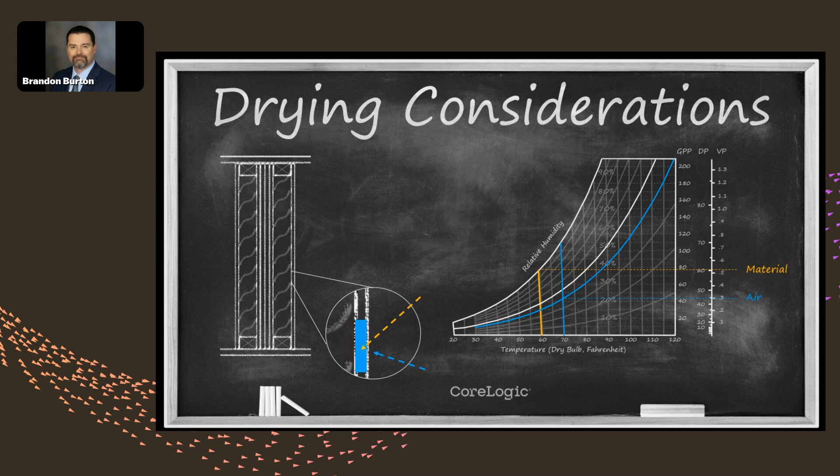However, we also took a deeper dive into that later in the year, and I'll share that with you here in just a minute as we go through our recap.

As we went through that initial introduction into specialty drying, we also introduced the concept of specialty drying systems or equipment. Generally speaking, we were talking about adaptations to our standard carpet dryer with higher pressure and higher volume, axial fans that are ductable, high pressure blowers - things like the Airwolf, Injectidry, and Dryforce - and why those were important for controlling interstitial spaces.

Specialty drying application generally includes controlling these little microclimates that exist within the structure, and not overlooking the X-ray vision we need to understand where water exists on surfaces, where evaporation is occurring that does not have direct access to the air we generally control - the accessible living space. That's where our air movement and dehumidification is universally being applied. But those are often not the surfaces where evaporation needs to be managed.

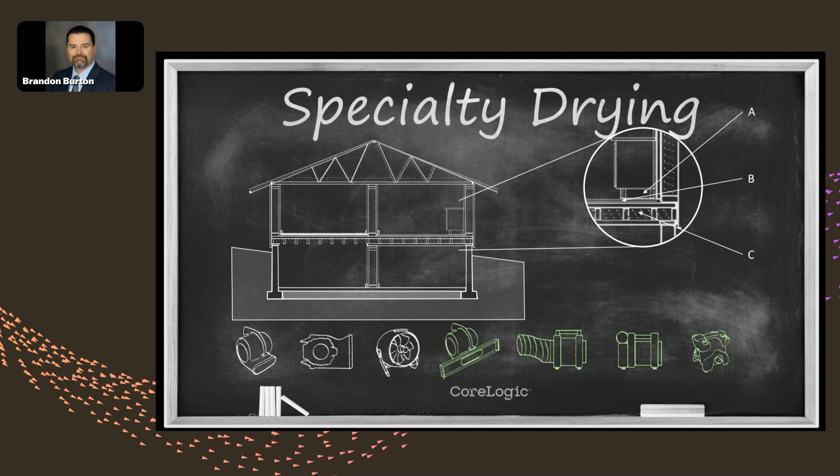And they're generally, in specialty drying situations, not the surfaces where we need to focus on environmental control - controlling temperature, humidity, and circulation to promote evaporation from these hidden and trapped surfaces. That's kind of a high-level overview of the world of specialty drying: understanding where these microclimates exist, how to access these climates, and how to control these climates.

We also took a dive into the S500. We talked about some of the language in the S500 that gives us information on what needs to be done in these specialty drying situations. First, it defines that these situations are where water is deeply held or bound, where we can have significant absorption into low evaporation materials and assemblies, and permissive statements - the 'may' statement in the S500 that says as a restorer you have permission to use specialty drying methods, that drying times will be longer, and that substantial vapor pressure differentials are your ally. And that's where we're going to focus.

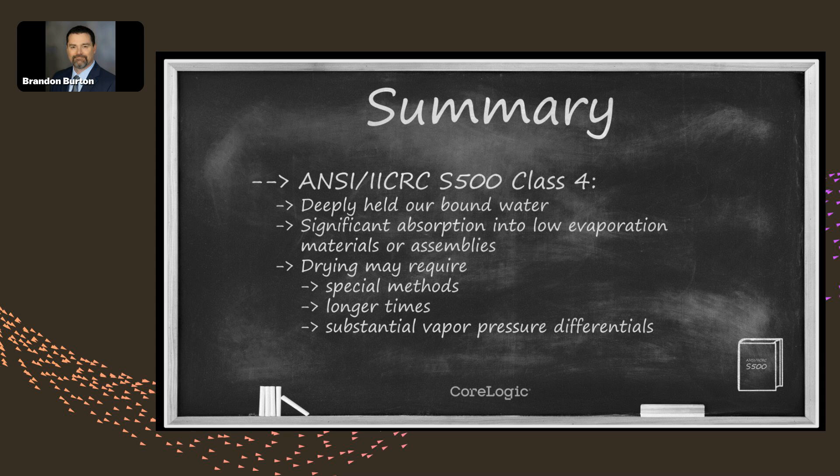Moving out from this, in episode 3, we took a break from the specialty drying topic - the first of 3 installments there this last year.

We took a look at the S700 document with a couple of special guests. This episode was an interview where I interviewed two subject matter experts involved in the S700 creation. One was John Pletcher, vice chair of the consensus body and owner of RestoreTech. The other was a longtime friend of mine and industry icon, Cliff Zlotnick, who's been part of the restoration industry specializing in fire and smoke restoration for more years than he probably wants to admit. He's been in that space for about as long as I've been alive.

We walked through the S700 and understood not only what the document is, but where it came from—the roots and history, going back to the days of the RIA, working through the FS1 and FS2 documents, culminating in the development of our first official ANSI standard for fire and smoke restoration, published this year.

We dissected the document, distilling it down to the workflow for fire damage restoration, what standard of care means, and the main buckets that work through that workflow. This isn't a core area of my expertise, so I won't give a deep summary, other than to say if you're involved in fire and smoke restoration, I'd highly encourage you take a look at that episode. If you haven't already, make sure you have access to the S700 and review it—particularly the should statements, the standard of care statements that document embodies.

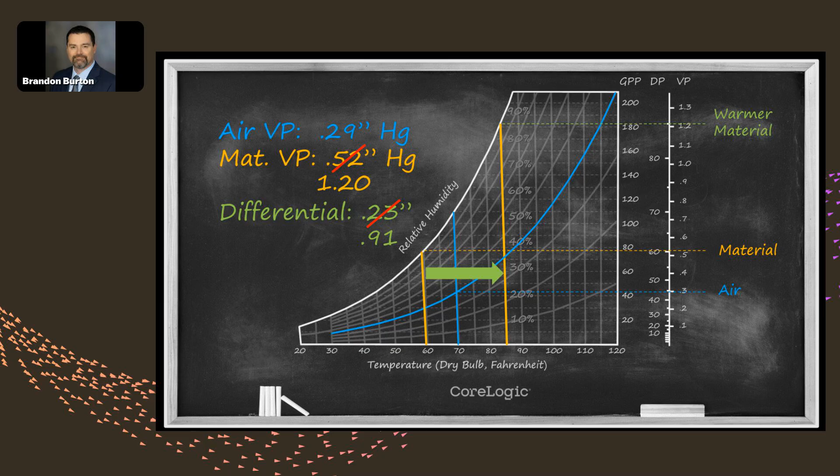If that's reasonable and practical, is a 4-time increase in my drying rate going to be beneficial? If so, then let's proceed with that drying decision for that material that may not have made progress in the last 24 hours, given the situation or circumstance.

We then got into some specific applications of how to do that. We took a look at some of the different drying systems, talked about managing the microclimates so that we can use elevated temperatures at a reasonable economical cost to the project, as opposed to raising the temperature of entire areas or spaces, especially when they're occupied.

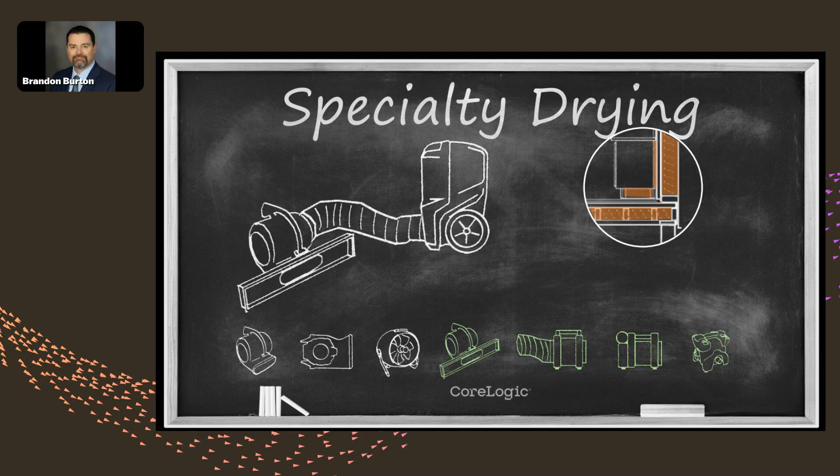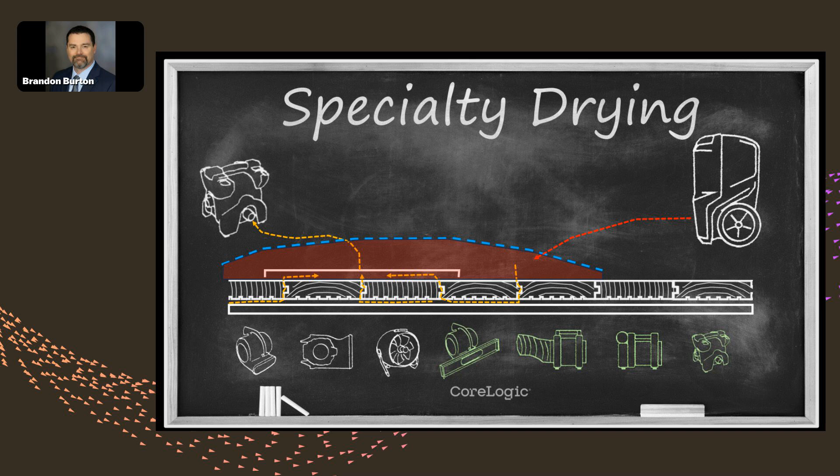And we got into some examples using some specific equipment that is generally available in industry. We further walked into those examples by getting into hardwood floors, and talked about elevating the temperature in the first foot above the floor, not the entire room, then using rescue mat systems or Injectidry systems to deliver that air to the bottom of the floor through a vacuum system. If this is completely foreign to you, I highly encourage you to take a look at that episode because we took a really deep dive into hardwood floor applications.

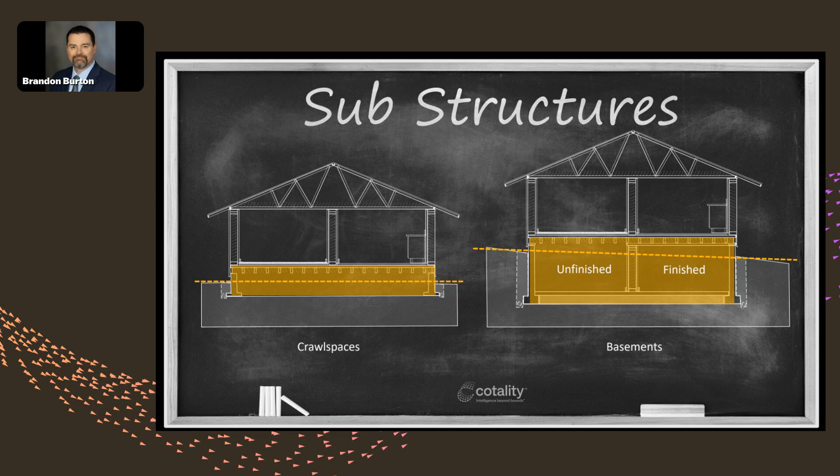Moving on to episode 5, we got into substructures. We decided to go from there to beneath the structure and take a look at some of the drying challenges that exist with crawl spaces, basements, anything deemed below grade. We first defined what substructures were, anything deemed a below grade structure within the space. From there, we took a look at some unique variables that relate to below grade structures and how they would apply to our drying plan or overall project management strategy.

We talked about ventilation as an option, especially with an unoccupied space. We talked about dealing with bulk water, dealing with insulation and vapor barriers, and how to control evaporation and evaporative drying, and when to consider barrier replacement.

This is one of the key takeaways I'll focus on for this review and recap. One of the primary areas for those of you that deal with crawl spaces, especially dirt crawl spaces below structures like I do up here in the Pacific Northwest, one of the questions I often get is, do you remove a vapor barrier when a crawl space is wet, especially thoroughly wetted? And do you replace that vapor barrier after you're done drying?

And my response is no. I do remove the vapor barrier if it's compromised, or if I have standing water above or below it, but that vapor barrier is replaced as soon as the bulk water has been removed and the crawl space is accessible for reinstallation. The reason is I'm not focused on drying the dirt, I'm focused on drying the structure. The longer damp dirt is accessible to the atmosphere I'm managing, the more difficult it is for me to focus on the structure.

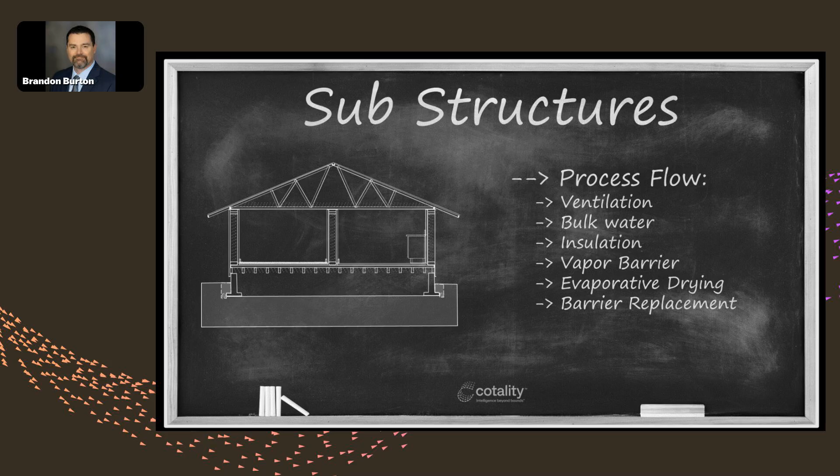Having said that, I will ensure we deal with the bulk water before we reinstall the vapor barrier. Get rid of the mud, get rid of the stuff that's going to require scuba gear for you to go back down and install the vapor barrier. But you don't need to return the dirt to a dry standard, unless there's a drainage problem and that dirt doesn't have the capacity to drain, which would be an engineering problem with that structure. So there could be an exception in that case. But as long as that's not a unique circumstance with that project, the goal is not to return the dirt to a dry standard. The goal is to return the structure to a dry standard and let the earth beneath the dirt deal with the earth beneath the dirt.

Moving forward, we also talked about monitoring in substructures. One key takeaway I want to emphasize from this episode is that you don't necessarily need to crawl a crawl space every day to get your monitoring data. You should be monitoring those materials on a daily basis as the S500 articulates.

But if you're down there on day one, create some connection points, use standard speaker wire and run that out of the crawl space, and monitor from there, whether through the interior or exterior access. A couple of wood screws, a couple of ring terminals, and a speaker wire, and all you need to do is connect your instrument to the end of that speaker wire when you come back each day instead of having to crawl the crawl space.

I spent a lot of time being the little guy that always got shoved in the crawl space because I fit. So I have a little animosity about having to crawl a crawl space when I don't have to.

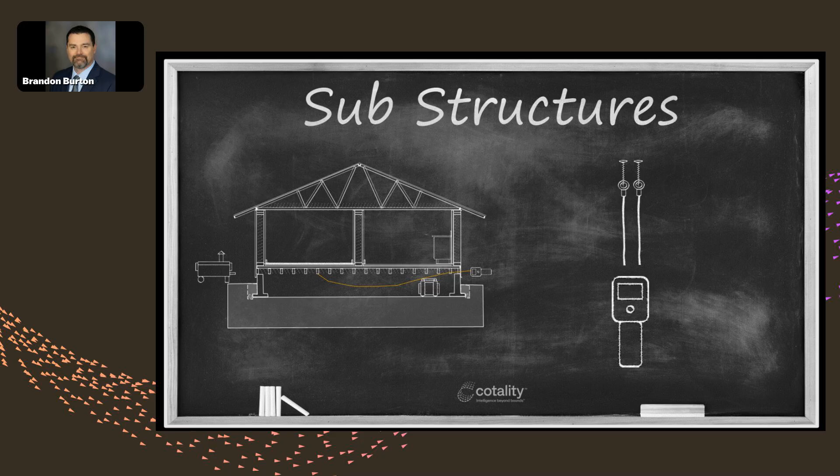So this, to me, is a really good time-saving tip. It also helps with consistency because when you're monitoring, as opposed to inspection, what's important is consistency in the location. You want to check the exact same way every day so that you ensure that any change in the value is really a change in moisture content, not a change in process. This really helps ensure that you're checking that same exact spot on a regular basis if you use this tip. It'll save you a ton of time suiting up and getting down into a crawl space.

And then we also talked about some of the summarizing of goals as it deals with substructures. Obviously, as with any project, the initial goal is always stopping migration and absorption, and then eliminating any damaged material in substructures. That can very easily be damage to drywall with standing water, damage to insulation, either overhead or in cavities. Elimination of the barriers that prevent you from dealing with the bulk water and dealing with the evaporation of structural moisture.

Then once the bulk water is removed, focus on the structure, right? Especially in a dirt crawl space. Once that bulk water has been addressed and the crawl space is dry enough to be accessible, focus on the structure and reinstall that barrier. And then never overlook the opportunity for open or combination drying. We spent some time dealing with that in that episode on substructure drying. We don't have time to dive real deep into that today, but way too often we overlook the value and the opportunity of good, heavy, forced ventilation in substructures and just how powerful and beneficial that can be.

Now we roll on to episode 6.

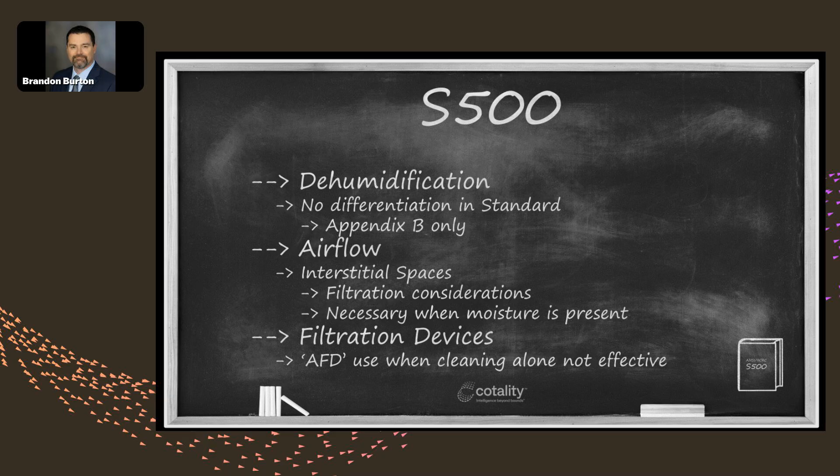Kind of moving into the details of that episode, we broke down the difference between LGR or refrigerant dehumidification and desiccant dehumidification. Our industry in general has really strayed away from a good, solid understanding of the difference between these two technologies and just the value that desiccant dehumidifiers bring.

There is a very substantial benefit to desiccant dehumidifiers, in particular in specialty drying applications. And the primary reason for that is the technological difference between the two.

A refrigerant dehumidifier is basically like a sponge. It does a really good job of soaking up bulk water. Just like a sponge, you can wring it out and put it back in the puddle, soak up more water, wring it out again, over and over. When the water is like a puddle in your drying process, it's bulk water with high evaporation. It's a beautiful technology for that because it keeps up with really high rates of evaporation and keeps them in check so you can control that environment and prevent further damage.

The limit with the refrigerant dehumidifier is that if you take a really big sponge and put it onto a single drop of water on your countertop, you can't wring that drop of water out again. You're not going to make that sponge dry enough to pick up really minute amounts of moisture like you need to in a specialty drying application.

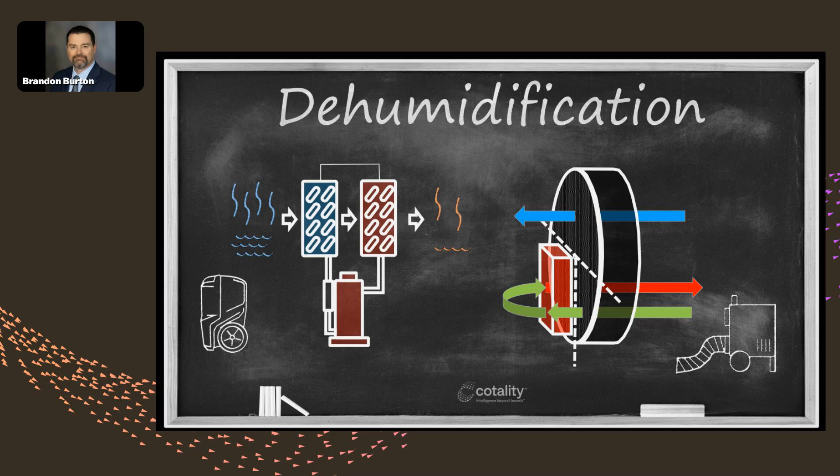So we got kind of deep into that technology and understanding that difference. The key takeaway was just that benefit of desiccant dehumidifiers, really excelling in the low end of humidity performance. They're not very practical in high evaporation environments, and that's an important call out. I'm not saying desiccants are the best dehumidifier in all cases. For your general humidity control, especially high grain, refrigerants excel. But when you're trying to create an exceptionally low humidity where you have problem drying areas, that's where desiccants excel.

We then moved into air movers and talked about the difference in technology with air movers. We put this down into a few different buckets: the airflow they produce, cubic feet per minute or CFM, the force they produce that air with to overcome resistance, something we call static pressure, and last but not least, their power efficiency. We took a look at that in terms of amp draw or amp consumption. Really, it's watt consumption, but since we generally use 110 as a standard, we just looked at it from the perspective of amp draw.

We then relayed that into a graph so we could take a look at the varied mix of performance across these specifications for different types of drying systems. The lesson learned and the takeaway was that an air mover that's really good for CFM and really good for pressure is generally not great for power consumption. If I want high flow and high static, it takes a lot of power to do that. And that's the reason why we have so many types of air movers in our industry.

Some air movers are really good at power control. Some are really good at airflow. Some are really good at pressure. And some are really good at both pressure and flow, but they're horrible on power consumption because they're really good at both. That's the reason why we have so many specialty systems.

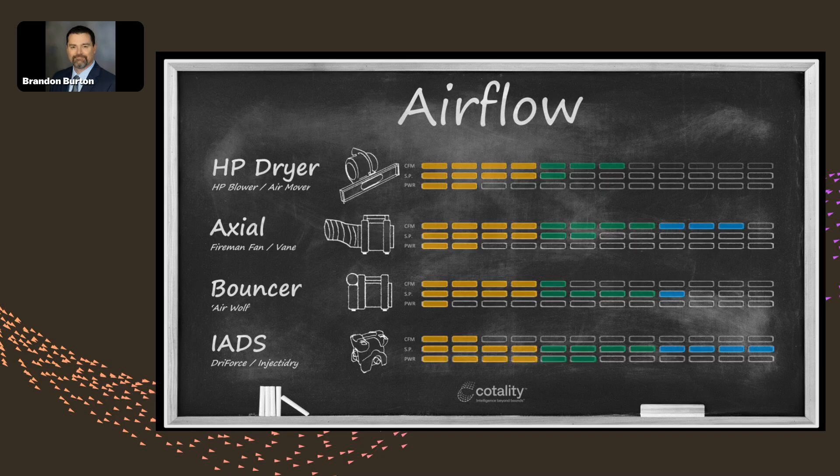A true inter-air drying system, at the very bottom of the chart, has a static pressure of 30 inches. So relate that to some of these specialty drying scenarios where we're trying to pull air up between hardwood flooring boards or force air through insulated wall cavities. When you connect these two, air will move, or the cavity will inflate—one of the two. Both are entirely possible depending on the construction.

That was the walk into air movement and air movement strategies. We got very specific in this episode with hardwood floors. One key takeaway I want to share with you today is that these drying mats we use on hardwood floors are very often used wrong.

The example I'm putting on screen for you, with the yellowish or whitish shaded areas, represents the mats. In the background you can see the direction of the boards. Notice how my mats are installed perpendicular to the boards. There's a gap between every mat, and the gaps are longer in the direction of the boards and shorter perpendicular to the boards. This is the right way to install these mats.

If this doesn't make sense, or this isn't how you're installing these mats, you need to watch that episode because you're not getting the full benefit out of that mat system. The goal with those mats is to create a vacuum that draws air up underneath the mats between the installation joints—the tongue and groove joint between those boards.

That creates a negative pressure under the mat beneath the boards. The airflow is then generated as air migrates to that area beneath the mat, and the makeup air goes down between the boards. There has to be an area around those mats for the makeup air to go down between the boards—otherwise nothing's going to come up underneath the mat. You're just going to create a vacuum lock, putting negative pressure beneath the floor that generates very little airflow if you don't allow for that makeup air.

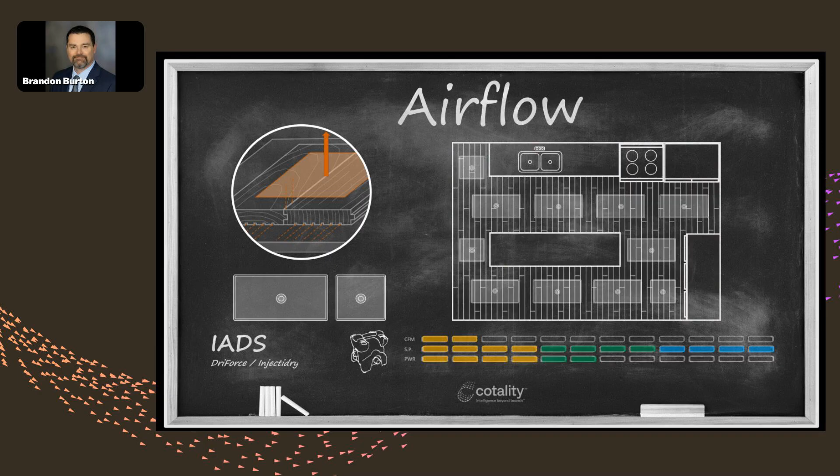Key takeaway there. Then last but not least—and I'm spending a lot of time on this episode, but it was a powerful one—we talked about filtration and the installation for air scrubbing. We talked about how installation of these devices is generally best done with a little bit of lay flat ducting: the intake at one end of your chamber and the exhaust at the opposite end. In a large chamber where more than one air filtration device is needed, you do that a couple of times.

The reason this is the best and most ideal installation methodology is because it forces an exchange. What we're doing is causing air to move from the exhaust end of that lay flat ducting back towards the intake where our air filtration device is installed. If I just drop one of these in the middle of the room, I generally don't get the type of particulate control I will if I use the lay flat ducting and force an air exchange between the two extreme ends of the space within which I'm trying to control particulate.

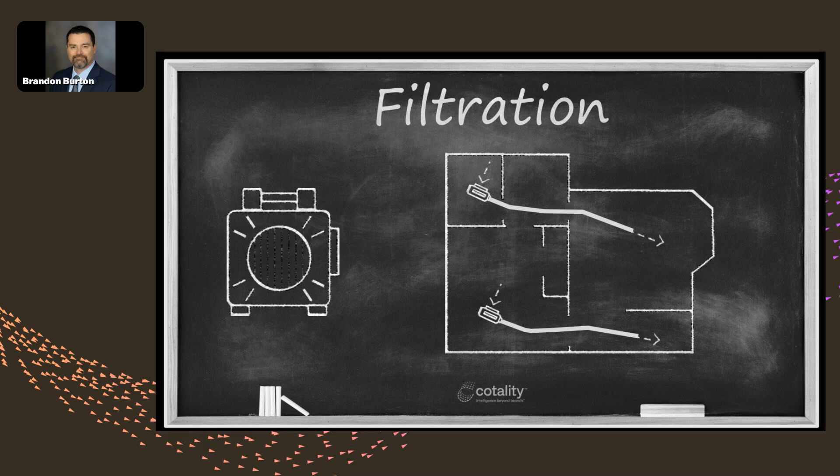So really, key takeaway from that discussion—I'm summarizing it, and again, we get into more detail within that episode. In Episode 7, we took a bit higher-level look at restoration projects, and we talked a little about maximizing efficiency in the project plan.

And then I translated that not only to efficiency, but profitability, right? So let's take a look at some of the key lessons we walked away from on that particular episode.

We took a look at the S500 and first started by understanding how important it is to have a drying plan and a work plan for putting that drying plan into effect. The S500 makes it a standard of care item to have these plans in place. They don't necessarily have to be unique for each drying project—you can have a standard drying plan that fits most projects and modify it as necessary for specialty situations, especially when there are limitations, complexities, complications, and conflicts, as the S500 calls out. More on that in a moment.

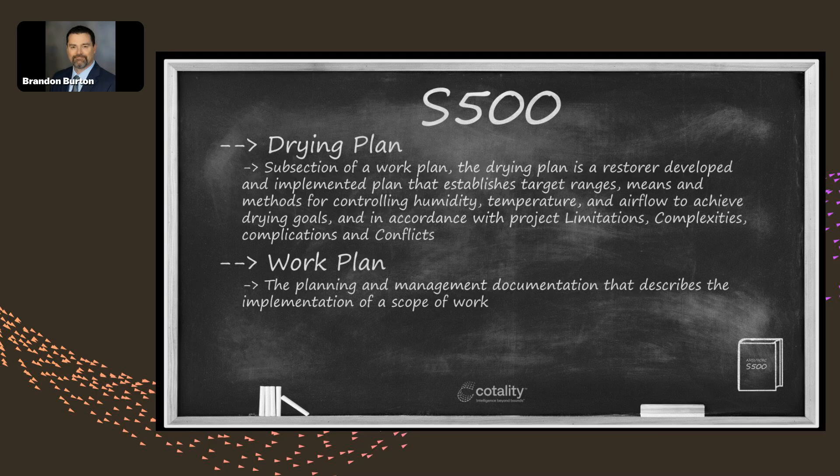From there, we took a look at a flow chart that helps us manage that plan. This is a flow chart I've walked through a couple of times here at Technically Speaking. It's one I've used in water damage restoration training since about 2000 or 2001, with a few modifications along the way. What this chart does is help the technician or project manager understand that although this is my plan, it gives me the freedom to make modifications to my approach, adapt to the project, and document why particular steps were taken. It brings logic into the process, mitigates risk exposure, and mitigates overall cost while maximizing profitability. I'll show you an illustration of that in a moment.

Generally speaking, this forces me as a technician to first assess what is actually affected within the space, and then tailor my restoration based on a triage assessment—looking at contamination, damage, and cost. Those are the three main buckets, based on everything affected, that drive my decision for what to restore and what to replace. Once I know what to restore, I measure the amount of moisture in those restorable materials, document that, and deploy the appropriate drying strategy based on class of water, available resources, environmental conditions, etc.

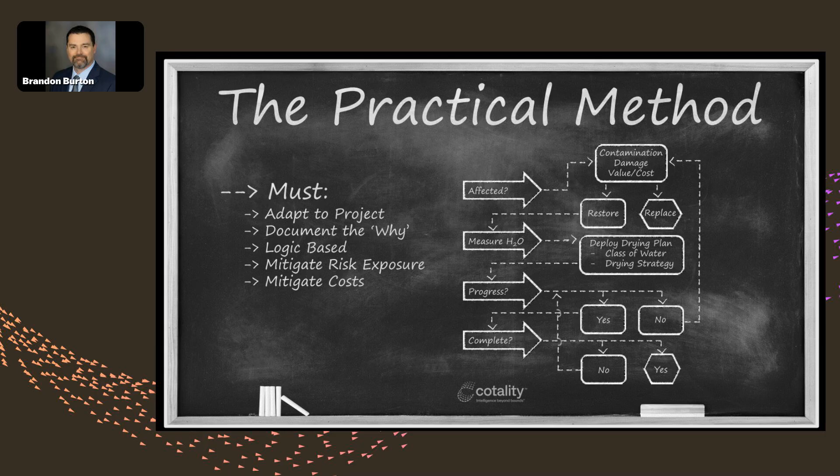At that point, if there's progress, great, we continue. If there isn't progress, we adjust, we change, and we use the lack of progress as the evidence and proof for the reason of the change, and document accordingly. It's a critical process that drives me to ensure that in every restoration circumstance, I'm deploying the approach most appropriate for that particular project.

Now, when we do that, this is the end result. I want to walk through this, because it's a very key takeaway from this year. And I'm going to drive this home by asking you a question: would you rather have 10% of $10,000, or 40% of $6,000? Which would you rather have?

Would you rather have 10% of $10,000 or 40% of $6,000? Obviously, I would rather have the 40% of $6,000 because that's more profit coming into my organization. It's also a far less complex project to collect on.

Think about your accounts receivable. When 90 to 95% of your project is demolition and reconstruction, the accounts receivable and collection process can be far more complicated. When 90% of your accounts receivable is mitigation and drying, your accounts receivable are generally much more manageable in terms of time to payment and complexity of collection.

So what this does is it drives us to understand that by applying the process on the previous slide, if I'm only removing or demoing what I have documented evidence should be demoed or removed, and I dry the rest, we become more profitable, we mitigate the accounts receivable, and the overall duration of the drying project and restoration project is shorter. Everybody wins in that process.

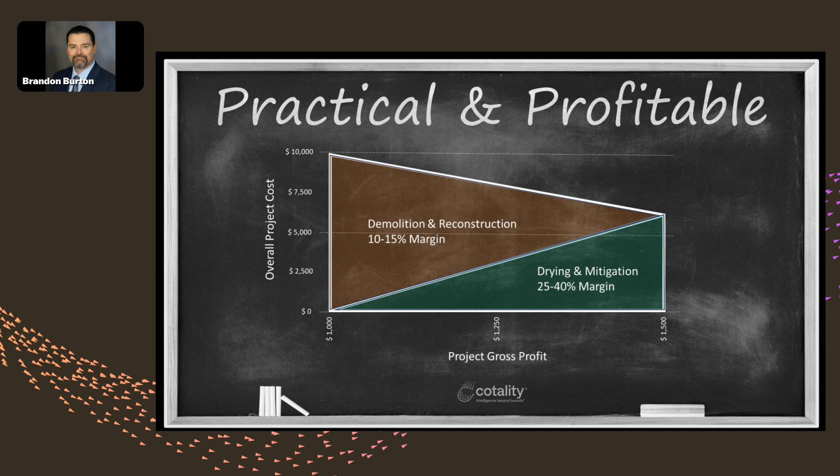And the final takeaway: don't remove something in a water damage project just because that's what you did last time. That was kind of the key message we were trying to drive in that episode. Don't do it because that's what you used to do 20 years ago. Don't do it because that's what you did last time. Do it because something on this project is documentable that says it needs to be done this time. Find the evidence for it and document the other evidence. Otherwise, restore it, dry it.

So episode 8, we shifted gears. As I said, more on this to come in a moment. Limitations, complications, complexities, conflicts. The most underused part of the S500 is section 11, LCCC. If you've never read it, I'm going to give you an assignment: you need to read this section of the S500. It's a wonderful tool for risk management. So let's take a quick review of some of the key lessons learned from that episode.

First of all, why is it important to understand this section of the S500? Because it helps you assess and quantify the risk level with specific decisions on a project. It can simplify the process of determining solutions, giving you objective decisions based on that risk level, which overall is risk management and risk exposure 101. It also gives you the ability to document those issues properly.

In a nutshell, basically what LCCC does is put issues on a project into one of 4 buckets, and you ask 2 questions to decide what bucket it's in. The first question: are you aware of the issue before the project starts? Yes or no. The second question: does the resolution to this issue afford me the opportunity to comply with the S500? Yes or no.

Now, if you answer yes to the first question, lower risk. If you answer yes to the second question, lower risk. If you answer no to either of those questions, higher risk. What you're trying to avoid is no to both questions. Because that's where ultimately the only way you can really mitigate your risk exposure is to document that there is a conflict, stop work, document the stoppage of work and the source of that conflict, and do not proceed unless the conflict is properly resolved.

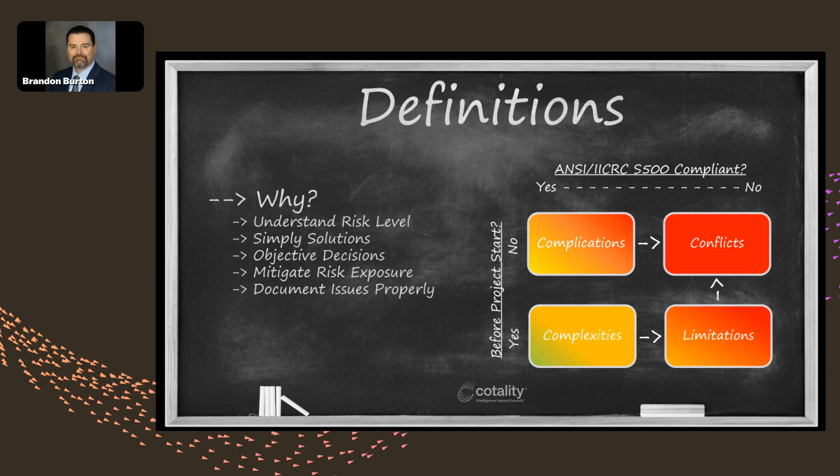Or we have communication that says, hey, this new piece of information has surfaced from the project. It's going to have an impact on the cost of the project, but we are proceeding with this methodology. If somebody comes to you and says, no, I changed my mind, now you don't have the ability to open up that wall assembly—that's a limitation. So again, with each of these, it gives us the ability to understand what are the effective documentation tools, how do we communicate, how do we manage that to ensure that we are mitigating our risk exposure as restoration professionals to the best of our ability.

All right, so that was the episode on LCCC. Now we get into the final quarter of the year. Episode 9, we got into atmospheric and moisture readings.

A couple of key takeaways with atmospheric and moisture readings, two in particular that I really want to stress. One is there are two different mindsets to moisture inspection, if you will, or moisture measurement. One is inspection, the other is monitoring. It is absolutely critical that you think of these differently.

Inspection is what you do like a bookend at the front of the job, at the end of the job, or at the end of the drying process in an area of the job. Inspection is highly detailed. I'm going to use my meter in more places than I care to document. It's going to be all over the place. I'm tracking from the source and out from the source, migration three-dimensionally. I'm finding where the water started, where the water stopped, how deep into the assembly the water has penetrated. I'm documenting the assembly components that are impacted, but it's just a high-resolution picture of that particular point in time.

From that inspection, I then establish monitoring points. I'm not going to monitor every location that I inspected. I'm going to determine where those monitoring points need to be based on the assemblies being dried, where my concerns are for slower drying rates, where there's built-up assemblies and complexity. I may have more monitoring points there. Where it's simpler or more porous, I may have fewer. It's completely at the discretion of the restorer. However, there should be at least one monitoring point in each of the components that are affected.

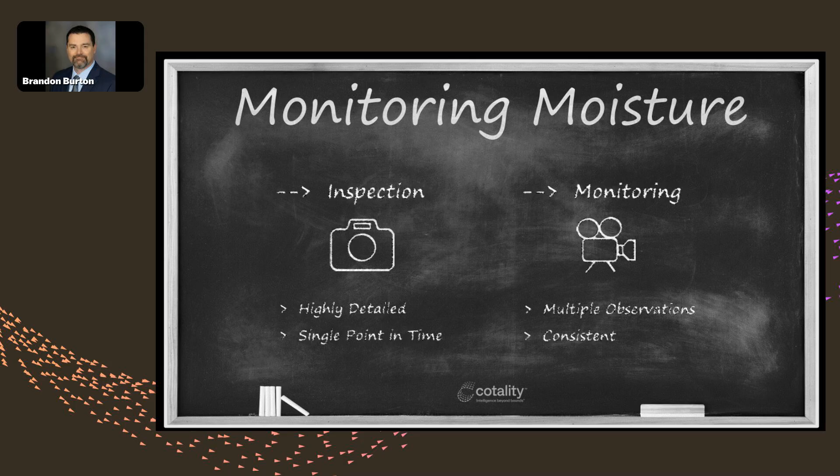If you don't use the same meter on the same setting in the same spot, on the same piece of paper or the same app or the same documentation system, then you don't know if the material is drying. You don't know if it's drying if that doesn't happen. So that's the difference between inspection and monitoring.

We got into some methodologies to control for consistency—I'm not going to get real deep into that, but we covered it within the episode. We also talked a little bit about atmospheric readings and monitoring, and I shared several takeaways. One key takeaway: what makes atmospheric monitoring confusing and throws the user into information overload is when you look at too much of it at once.

When I throw these numbers up on the screen, if you don't zero in on those two areas I've highlighted in yellow and know why I've highlighted those, then this just becomes data overload—just a bunch of numbers. The reason I've highlighted those two on screen is because the real value in atmospheric readings is comparison. If you're not making a comparison, the numbers by themselves really don't mean anything.

Let's take a look at that affected column on the upper left. Day one start: 70 degrees, 78% relative humidity, and 85 grains. That's what that first reading was. I've highlighted all of the grains per pound for that affected area, but 85 was the grains per pound initially. By itself, that doesn't mean a lot. 70 degrees, 78%, and 85 grains—what does 85 grains mean? Not a lot. If you want to be specific, it's 85 7,000ths of a pound of water in every 14 cubic feet of air processed by a dehumidifier. What does that mean? Nothing, other than sounding kind of fancy.

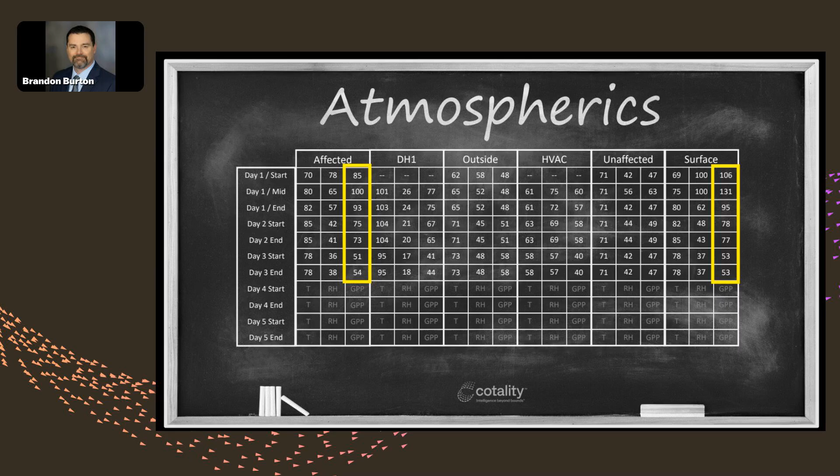That was the lesson learned with atmospherics. Kind of the key takeaway is if psychrometric readings and atmospheric readings look confusing to you, the first thing you need to do is understand that it's all about comparisons. It's not about a single reading. It could be comparisons of today versus yesterday, this room versus that room, this room versus the dehumidifier in this room, or this room versus outside. That's what yields the value in atmospheric readings.

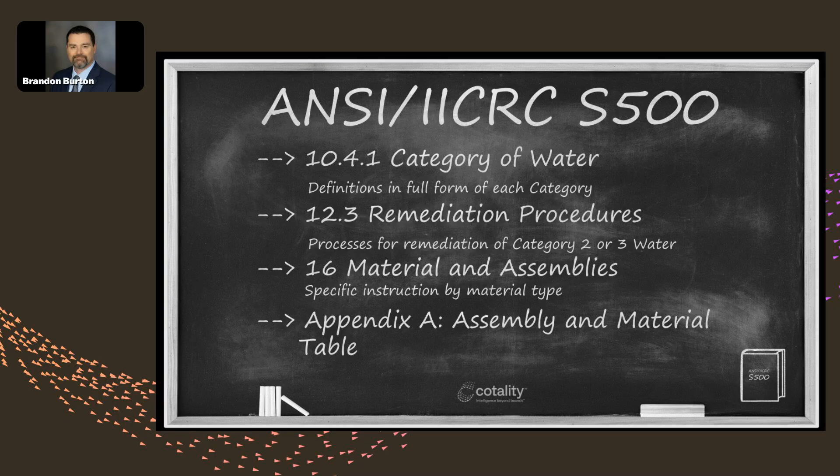So episode 10, we talked about categories of water. We got into a discussion of what the S500 has to say about categories, their definitions, remediation procedures, et cetera. We then got into the impact of source, migration, time, and temperature on category.

The primary and key takeaway as we went through this discussion on category was the understanding that the definition of category 1 is not that you could take a cup of water off the floor and drink it. That's not the purpose of category 1. That's not the reality of category 1, and that's not the reality of any water damage restoration project. That does not mean there's no such thing as category 1. We spent some time unpacking that and understanding that there are several situations and circumstances where category 1 does indeed exist, and the opportunity for drying materials absolutely exists.

We then got into a variety of discussion about the examples of category 2, the reason why category 2 is important, and kind of the sliding scale for procedures based on the severity of that category 2, which is the gray area between category 1 and category 3.

And then finally, we concluded with a deep discussion on the importance and urgency of understanding health and safety in category 3, and why category 3 is what it is, and how critical it is that we understand that those example sources for category 3 contain potential pathogens, things that can cause chronic disease, that can permanently impact the health, quality, or length of a human life. That's the reason why those procedures are so critical for category 3.

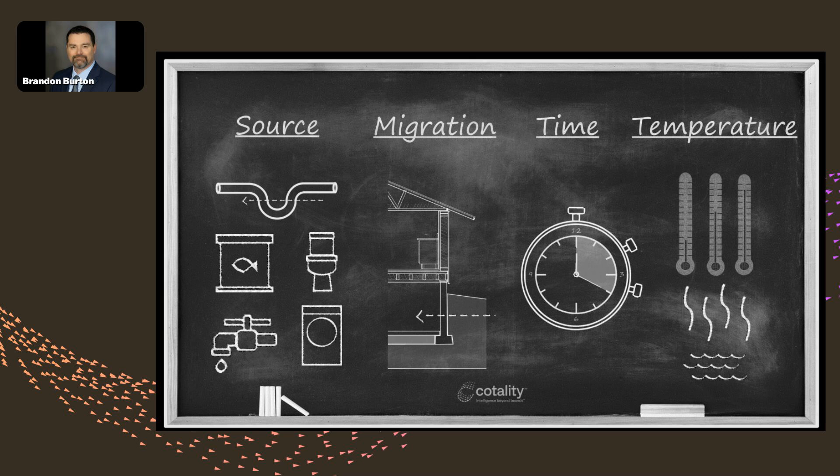And then I wrapped the session up with understanding how important it is to cite those sources from the S500, especially with property managers and non-owner occupants, in those situations where sometimes it can be tough to sell a category 3 remediation ahead of the drying and restoration effort, especially when time and cost are taking precedence over proper procedure and health.

Okay, last but not least, we got into thermal imaging. We talked a little bit about this in last month's episode. The key takeaway with thermal imaging is that it's a very useful technology that's permissive in the S500. It's not required, but there are circumstances where the restorer really can and may use thermal imaging to supplement the inspection and evaluation process. The S500 does, however, say that it is standard of care.

You should ensure that you're using a moisture meter to verify anything a thermal imaging camera does reveal as a potential area of interest within the space.

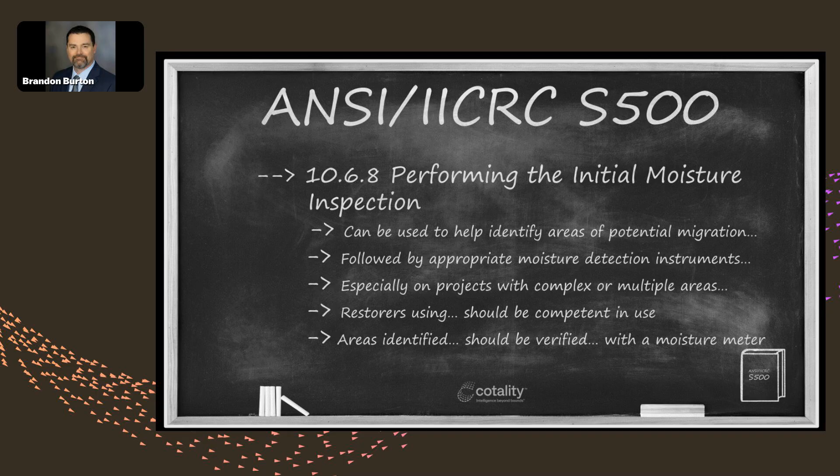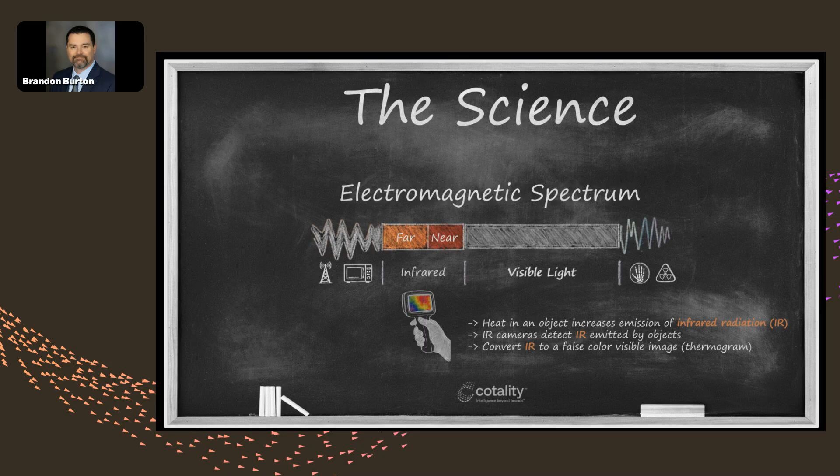We got specifically into the technology. We talked about what thermal imaging cameras actually detect versus what they display. They detect the emission of infrared light. They display a false color representation of that thermal emission.

We then got into some of the phenomena that impact that thermal emission: evaporative cooling, thermal capacity, thermal bridging. These are the reasons why a thermal imaging camera can be useful in the assessment of areas of potential moisture in a water damaged environment.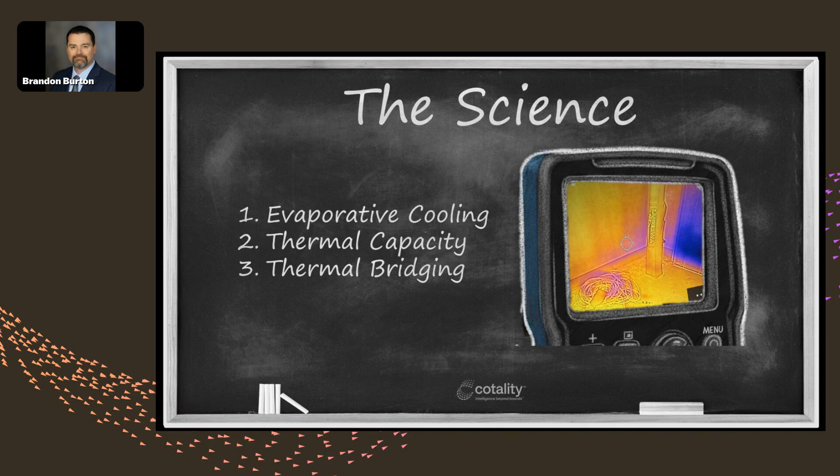We also got into all the reasons why they give you false news, right? All the other things that impact the thermal emission from a surface: airflow and drafts, missing insulation, thermal bridging, HVAC and electrical assemblies, surface reflections. So we took a deep dive into each of these.

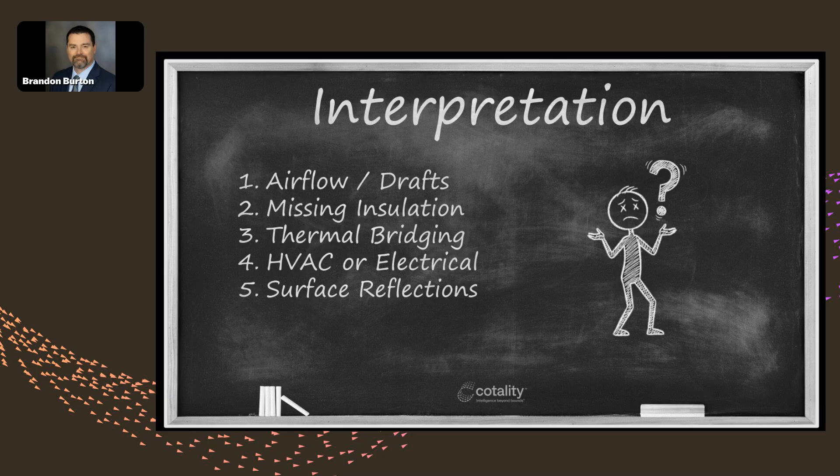And that was season 4. All right, that was a lot. We covered a lot in season 4.